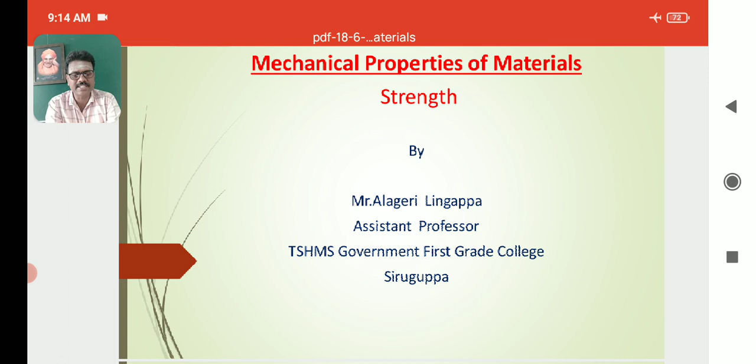Mechanical properties of material. To finalize the materials for our engineering products or applications, it is important to understand the mechanical properties of the material. The mechanical properties of a material are those which affect the mechanical strength and ability of a material to be molded in a suitable shape.

Some of the typical mechanical properties of a material include these. Usually the mechanical properties of the materials can be studied to select a material for specific applications. This gives an idea about which material is suitable for which applications, so that properties of materials can be used on a large scale in engineering products or applications.

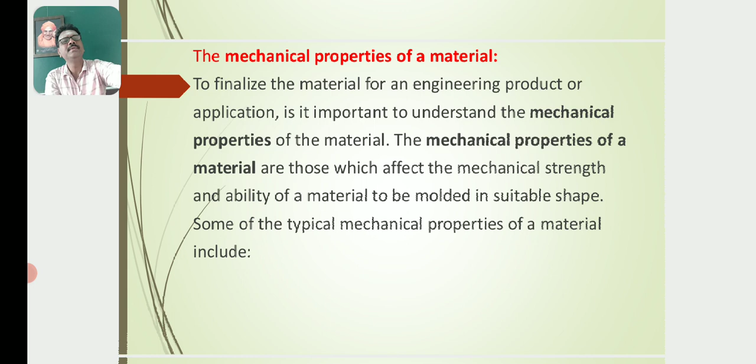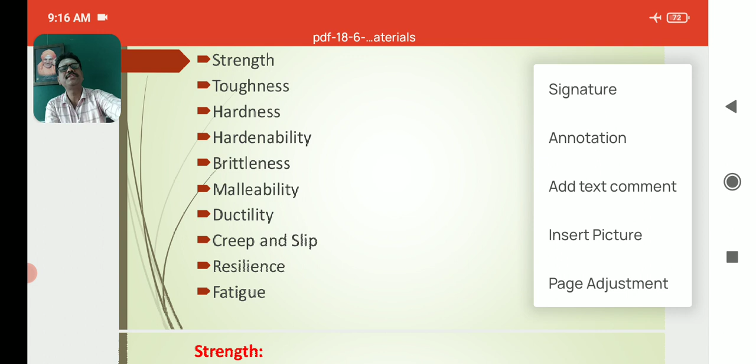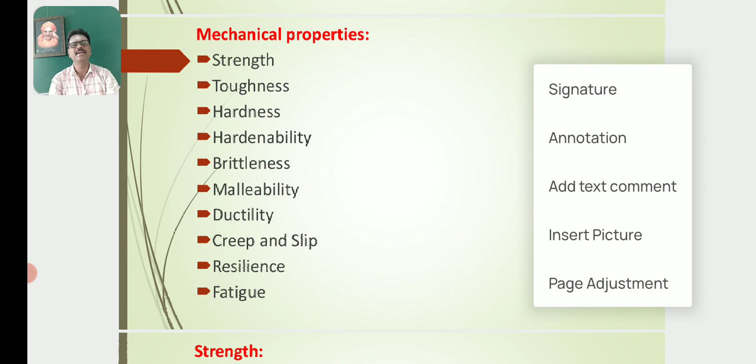Here are given some of the mechanical properties: strength, toughness, hardness, hardenability, brittleness, malleability, ductility, creep and slip, resilience, fatigue. Look here, these are some of the mechanical properties we have studied.

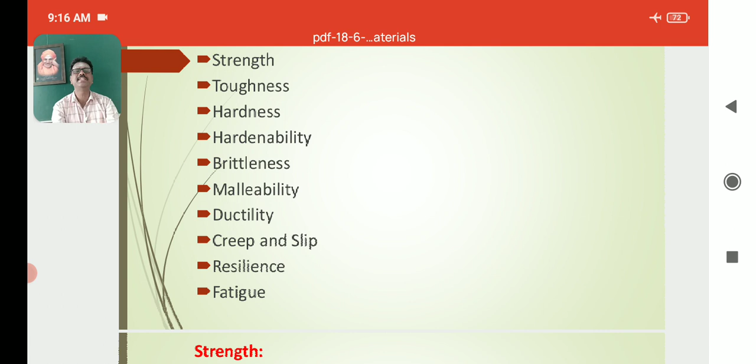Strength, toughness of the material, hardness of the material, hardenability, brittleness, malleability, ductility, creep and slip, resilience, fatigue. These are some of the mechanical properties of the materials.

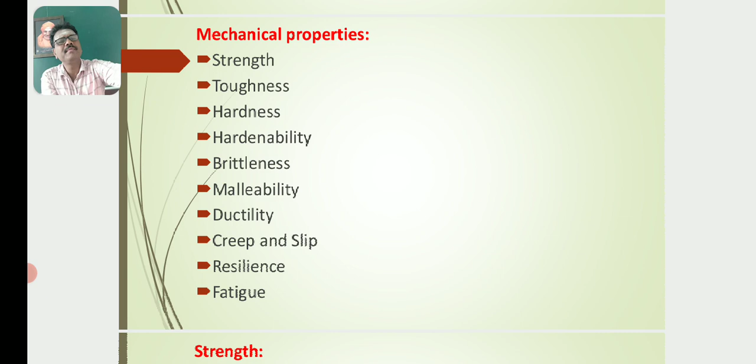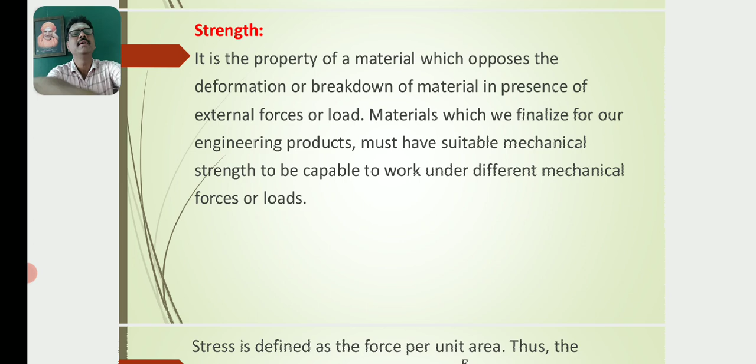These properties we must need to select a suitable material for different purposes in mechanical engineering. So today I am going to discuss strength of the material. What is strength of the material? How can that be determined?

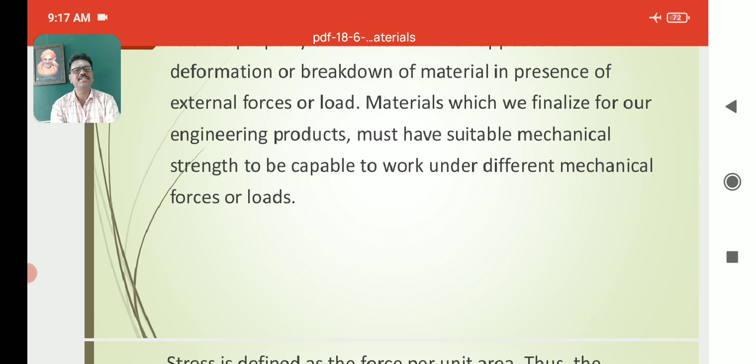Strength means it is a property of a material which opposes the deformation or breakdown of material in the presence of external forces or load. Materials which can be finalized for our engineering products must have suitable mechanical strength to be capable to work under different mechanical forces or loads. Strength means the property of the material which opposes the deformation or breakdown of material in presence of external forces or load.

So such property is called strength. This is the opposing property which resists deformation or breakdown of material in presence of external forces or load.

Take two examples, say aluminium and iron. Iron has more strength compared to aluminium, so we can easily bend the aluminium material compared to iron. So iron material has more strength compared to aluminium material. This is the inner property of the material which opposes or resists deformation or breakdown of material under the action of a large amount of external forces or load.

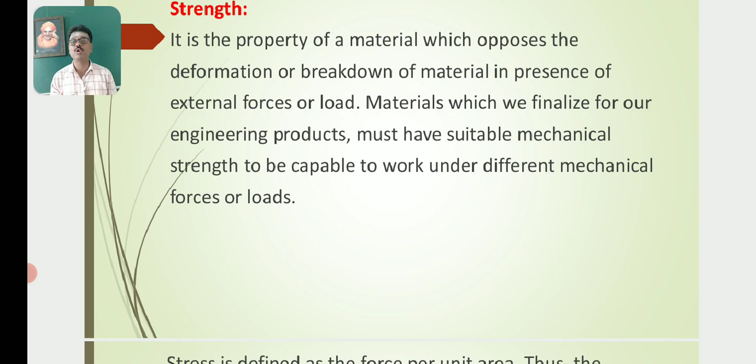By the basic concept, we know that stress is the restoring force generated inside a body per unit area. The formula for calculating stress is given by sigma equals F over A, force per unit area. Then we have different types of stresses, say longitudinal stress, normal stress, volume stress.

We have different types of stress. Stress means the restoring force per unit area, where sigma indicates the stress, F is load or force, and A is the cross-sectional area of the material. The most commonly used units for stress are SI units, pascals or Newton per meter square, that is the stress expressed in terms of Newton per meter square or Pascal, although other units like PSI, pounds per square inch, are sometimes used.

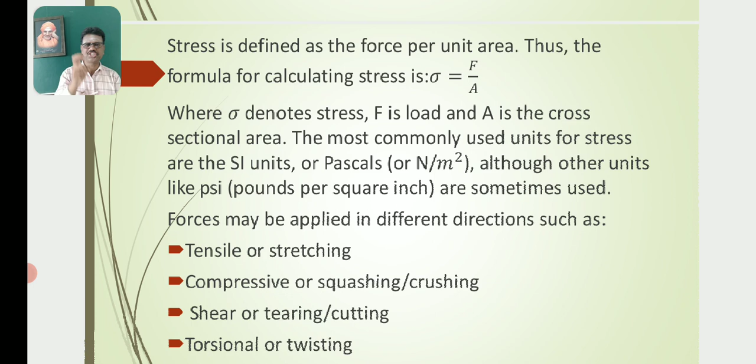That means the strengths: tensile or stretching is the first category. Compressive or squashing or crushing is the second category of stress. Shear or tearing or cutting is the third category. Then torsional, that means twisting stress or strength. These are the different types of so-called stresses based on the direction of load or force applied to the material.

Now let us discuss tensile strength. What is tensile strength? Which type of strength is said to have tensile strength? What about the examples for tensile strength? Tensile strength is defined as the maximum tensile load a body can withstand before failure divided by its cross-sectional area. This property is also sometimes referred to as ultimate tensile stress or UTS. Tensile stress is defined as the maximum tensile load or maximum force a body can withstand before breaking, before failure, divided by its cross-sectional area. This property is also sometimes referred to as ultimate tensile stress or UTS.

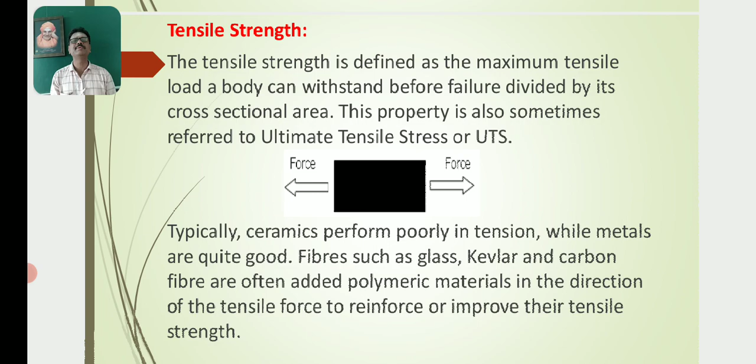There are three types of tensile strength: yield strength, ultimate strength, and breaking strength. Yield strength is the stress a material can withstand without permanent deformation. This is not a sharply defined point. Yield strength is the stress which will cause a permanent deformation of 0.2% of the original dimension.

Ultimate strength is the maximum stress a material can withstand, below which the body regains its original shape and size. After this maximum stress, the body loses its strength, meaning failure to regain its original shape and size. So the yield strength is the strength up to which the body regains its original shape and size, withstanding without permanent deformation.

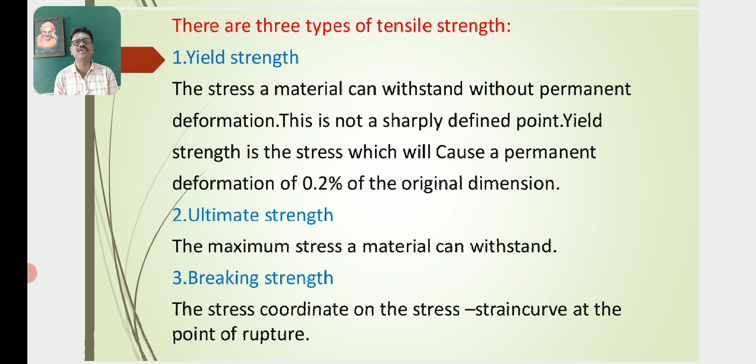Breaking strength means the stress coordinate on the stress-strain curve at the point of rupture. At that point, the body, without permanent deformation of its shape and size, breaks up, meaning the body does not regain its original shape and size. So breaking strength is the strength at which the body breaks up, losing its strength and failing to regain its original shape and size.

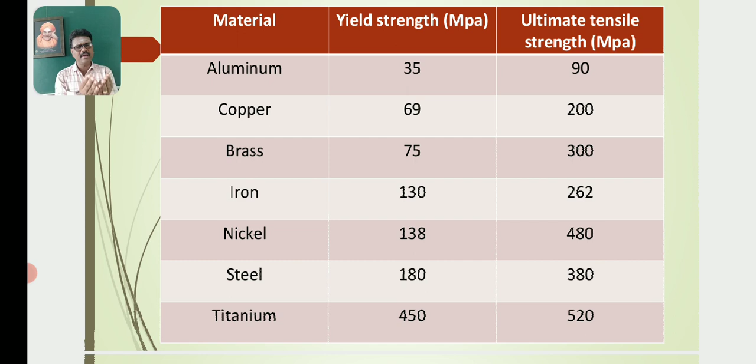We are given some materials with their yield strength and ultimate tensile strength in megapascals. Aluminium: yield strength 35, ultimate tensile strength 90. Copper: yield strength 69, ultimate tensile strength 200. Brass: yield strength 75, ultimate tensile strength 300. Iron: 130 and 262. Nickel: yield strength 138, ultimate tensile strength 480. Steel: yield strength 180, ultimate tensile strength 380. Titanium: yield strength 450, ultimate tensile strength 520. These are some materials with their yield strengths and ultimate tensile strengths.

Now let us discuss compressive strength. Compressive strength is defined as the maximum compressive load a body can bear prior to failure, divided by its cross-sectional area. When a body is compressed, two inward forces act on it. So the ability of the body to withstand, without permanent deformation, the action of a large force or load, is called compressive strength.

Ceramics typically have good compressive strength and are used under compression. An example is concrete, which is a good example for compressive strength.

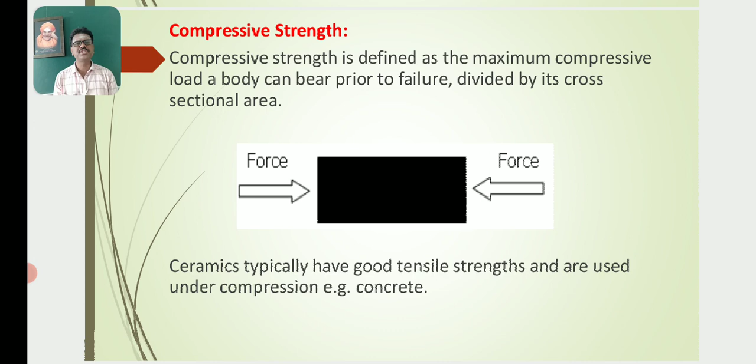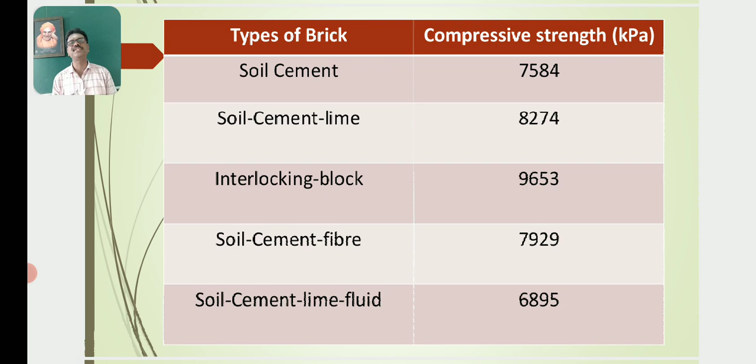So, these are the given types of bricks and their respective compressive strength in terms of kilopascal.

The next one is shear strength. It is the maximum shear load a body can withstand before failure occurs, divided by its cross-sectional area. Just as in the diagram, there are two forces acting in opposite directions, called shearing forces. That means the maximum shear force or shear load a body can withstand before failure occurs, divided by its cross-sectional area, is called shear strength.

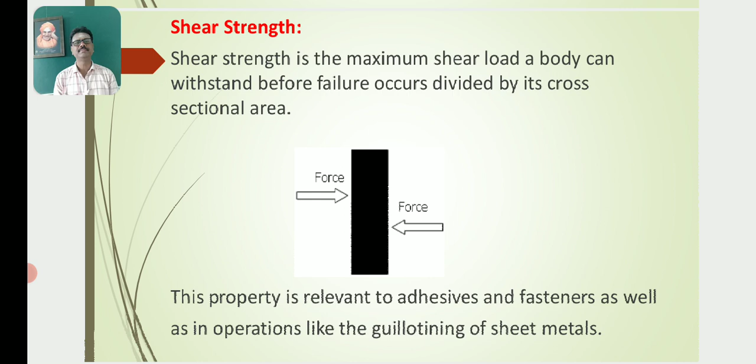This property is relevant to adhesives and fasteners, as well as operations like the guillotining of sheet metals. So this is what shear strength is about.

Shear strength in soils is the resistance to movement between particles due to physical bonds formation, from particle interlocking, atoms sharing electrons at surface contact points, and chemical bonds, so-called cementation, such as crystallized calcium carbonate.

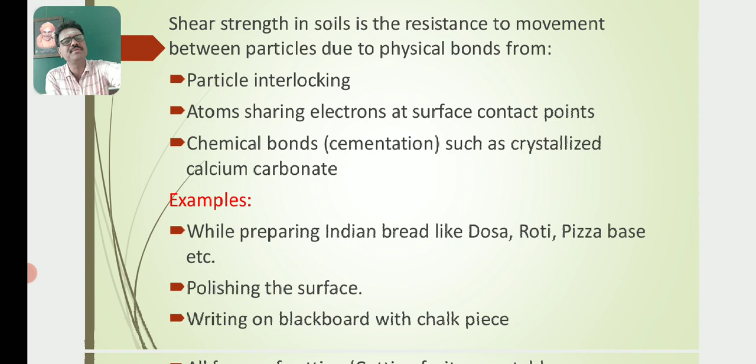Here are some examples. While preparing Indian bread like dosa, roti, pizza base, etc., we use shear strength. Also polishing surfaces, writing on a blackboard with a chalk piece, all forms of cutting - cutting fruits, vegetables, paper, cloth, tree, etc. Then painting, brushing, applying creams, soaps, ointment, etc. While chewing food between the teeth, that also gives shearing strength.

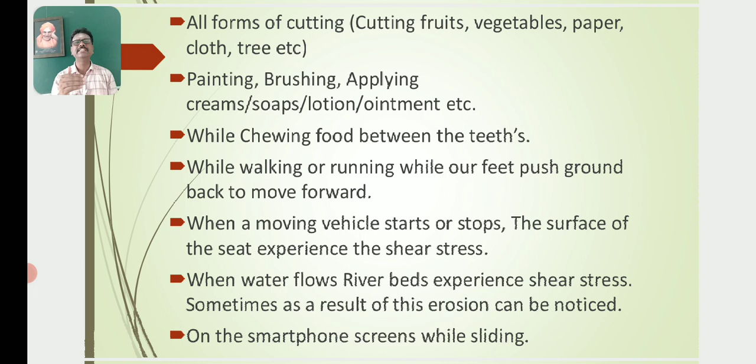While walking or running, our feet push the ground back to move forward. When a moving vehicle starts or stops, the surface of the seat experiences shear stress. When water flows, river beds experience shear stress, and as a result, erosion can be noticed. Similarly on smartphone screens while sliding - these are some examples of shearing stress.

Now let us discuss torsional strength. Torsional strength is the maximum amount of torsional stress applied to a body which it can withstand before it fails, divided by its cross-sectional area.

Torsional strength is nothing but twisting strength - the body which can be twisted. With torsional stress, if a body is twisted, at that moment a restoring force is generated inside the body, and that restoring force per unit area is known as torsional stress or strength. For example, twisting rubber versus twisting iron - twisting rubber is much easier compared to iron, since iron has more torsional strength than rubber. That is the difference in torsional strength between different materials.

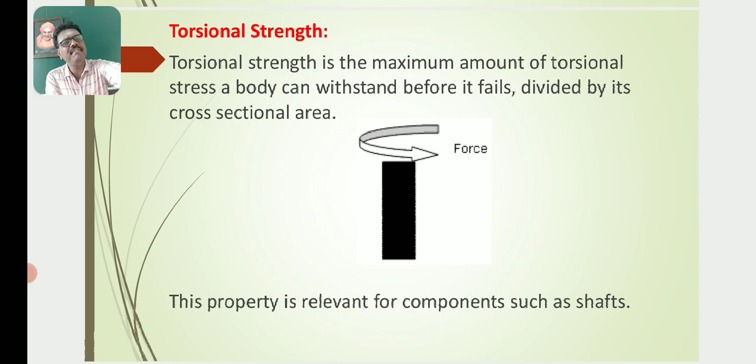This property is relevant for components such as shafts used in vehicles. Twisting a simple piece of blackboard chalk between one's fingers until it snaps is an example of torsional force in action - when we use a chalk piece for writing, it can be twisted between the fingers.

Here are some examples of torsion or torque in real life situations: using a wrench to tighten or loosen a nut - where torsional stress is used. Hinges in different constructions including doors, which work based on torsional stress or twisting stress.

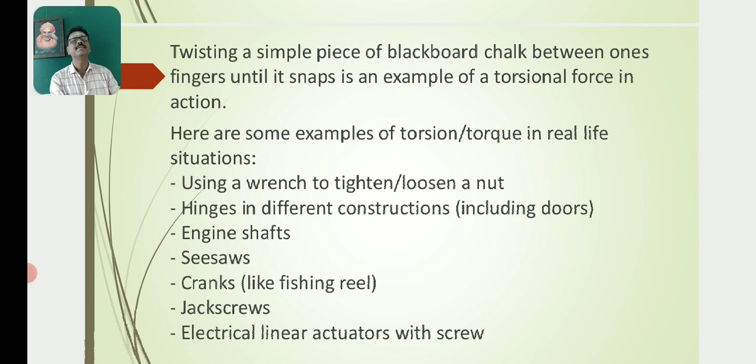Now let us discuss the definition of yield strength. Yield strength is defined as the stress at which a material changes from elastic deformation to plastic deformation. After this yield point, the body does not regain its original shape and size, giving permanent extension or elongation, so-called permanent deformation. Under that condition, the material exhibits the property of plasticity.

So, yield strength is defined as the stress at which a material changes from elastic deformation to plastic deformation. Once this point, known as the yield point, is exceeded, the material will no longer return to its original dimensions after removal of the stress - this is the concept of yield strength.

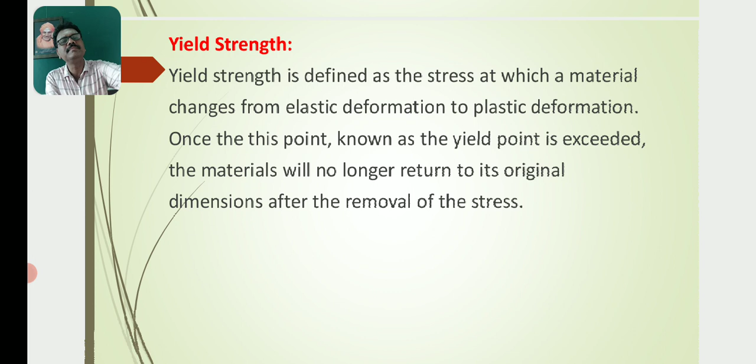In this class, we discussed the mechanical properties of materials - different types of mechanical properties, different types of strengths, examples for strengths, and statistics for strength, and so on. Thank you.